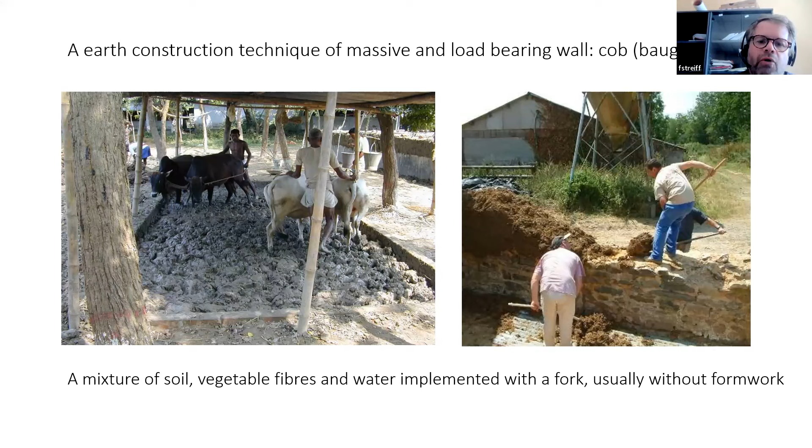So usually we work with a fork, and most of the time without any formwork, as you can see on this picture. So the mix most of the time is produced by animals or humans, and then implemented on the wall directly with a fork. We just build a first layer of this mix of cob, a layer that is around 50 to, let's say, 1 meter high when the soil is very good for that. But most of the time it's a height around 50, 60 centimeters,

that we will let dry very little, so 1 to 2 days, before we cut the face of the wall with a specific tool we call the paroir in French, which is something used to pare or to cut or to face the wall. So it's a kind of spade, as you can see on the left of the picture, that allows us to cut at the final size and shape the wall.

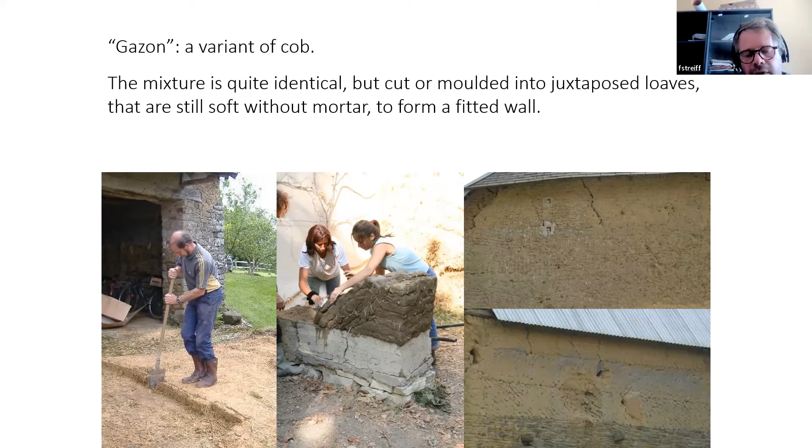with each other, and as they are not dry, they stick together, and that allows us to produce that kind of wall that you can see here with that implementing process, like fish. I don't have the word in English, sorry, but you can see the shape changing from one layer to the other. So that's another way to build, a sort of variant of cob.

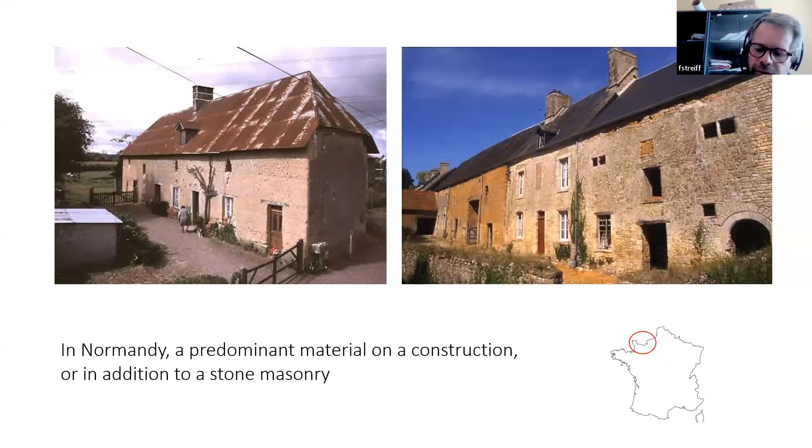In Normandy, cob can be used as a predominant material in construction, as you can see on the left pictures, or it can be used as an additional material on stone masonry for barns, or just to elevate the stone walls a bit more. But especially in the marshes of Cotentin and Bessin, so in the middle west part of Normandy, we've got huge buildings, and old buildings. Most of the ones you can see here are from the 16th, 17th century and still existing, made with cob.

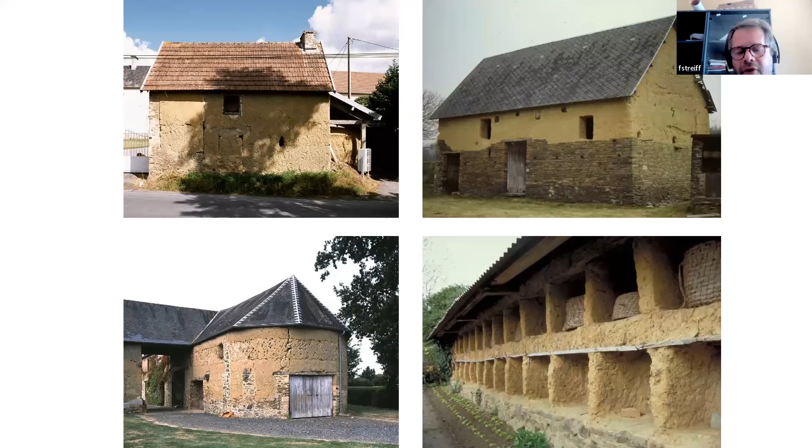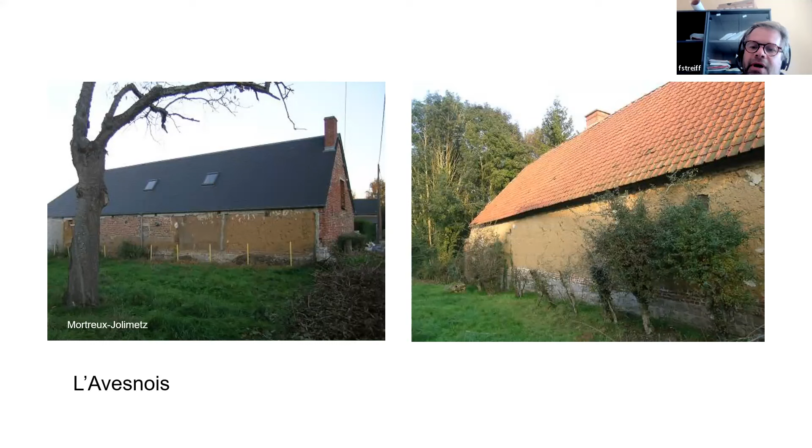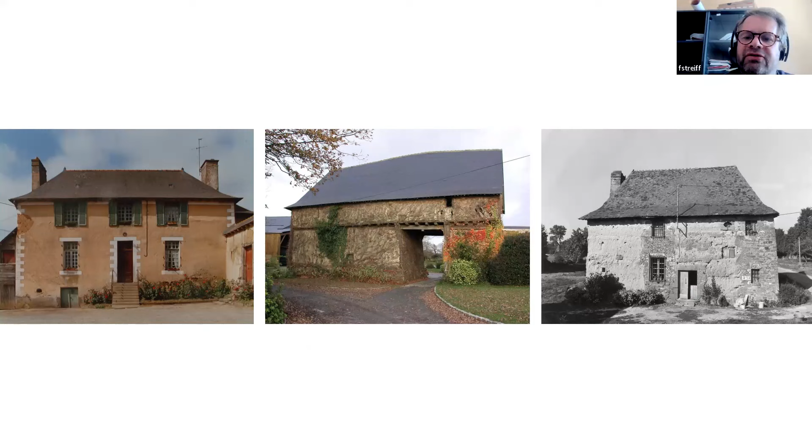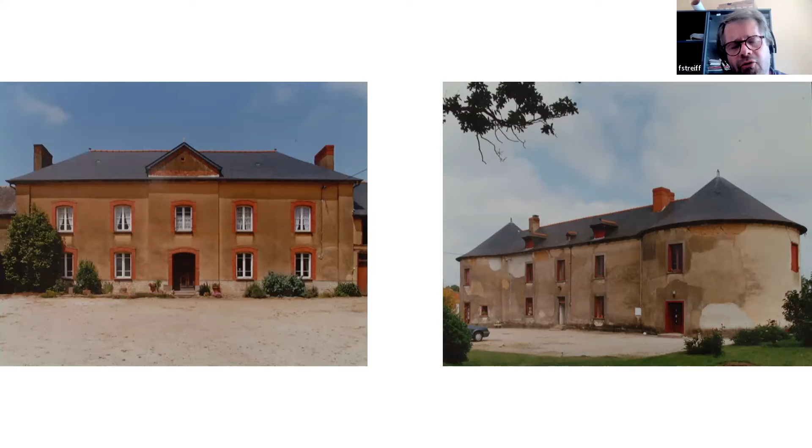Like this one, lots of farms as well from 17th to 19th century. Mostly those buildings were built between the 18th and 19th century. Lots of farms as well, so huge buildings, 2-story, sometimes 3-story. In Brittany, this building, for example, on the left is a 3-story building, but well, cob is really used. We've got the same amount of buildings in Brittany, around 20,000 of those buildings still existing today. So it'd be like in Normandy here.

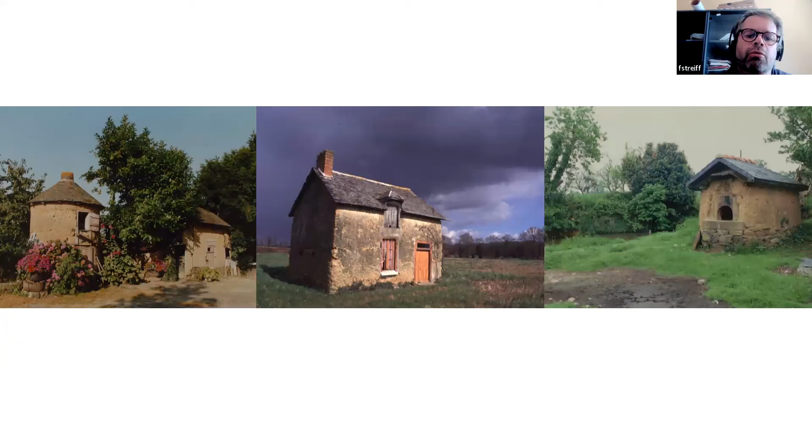So other samples here to show you that it's really a very important technique used in west of France, and as well for very small buildings. We've got some very small other area in France where we can find that sort of buildings here in Vendée, so center-west of France, close to the sea. So small, very small buildings here, built with a very sandy soil with a bit of clay. And these ones are very poor compared to the ones you can find in Brittany or in Normandy. They are very, very small buildings, small farms.

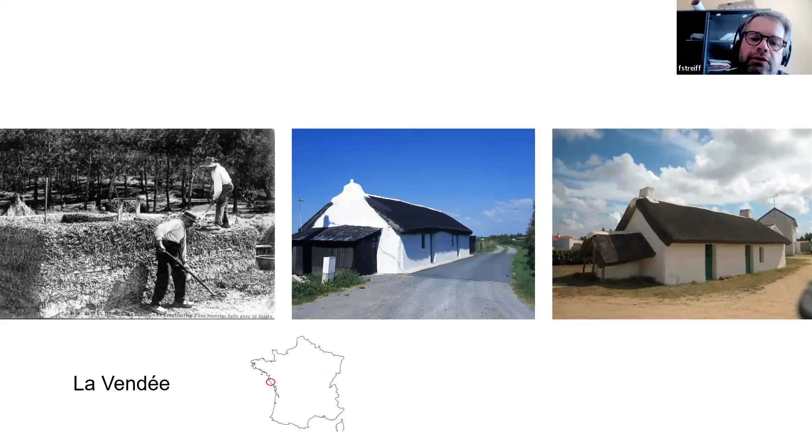And same thing for the Pays de la Loire. So around the Loire River, we've got plenty of those cob buildings, mostly for farms, not for a living place for people. So a heritage that is really in danger because there's no use today. So lots of those buildings are in a very, very bad state, as you can see here.

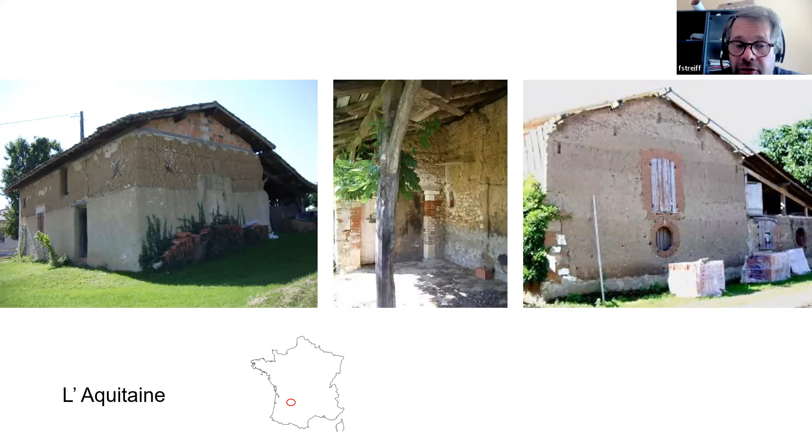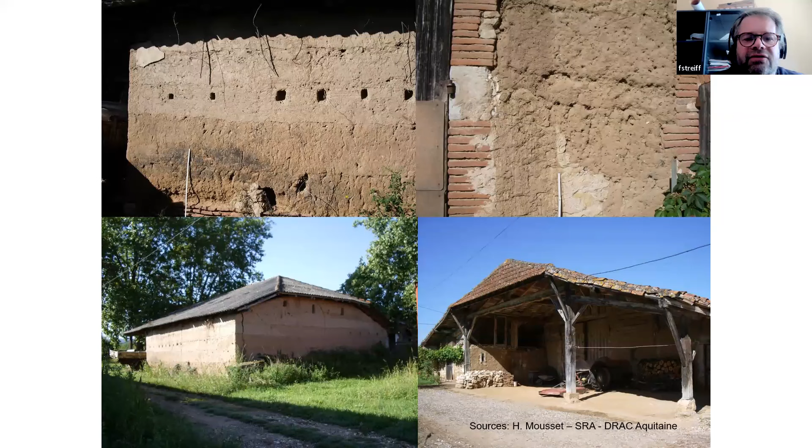And south of France, we have also huge heritage, a small area, so less buildings compared to Brittany and Normandy, but very nice ones, and as well some farms, so some places where people are living, so quite well maintained. People try to renovate the house properly. So a heritage that is still in a good state mostly.

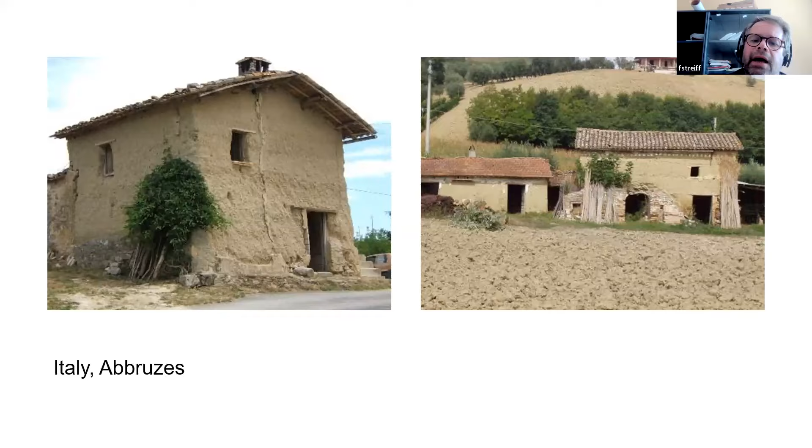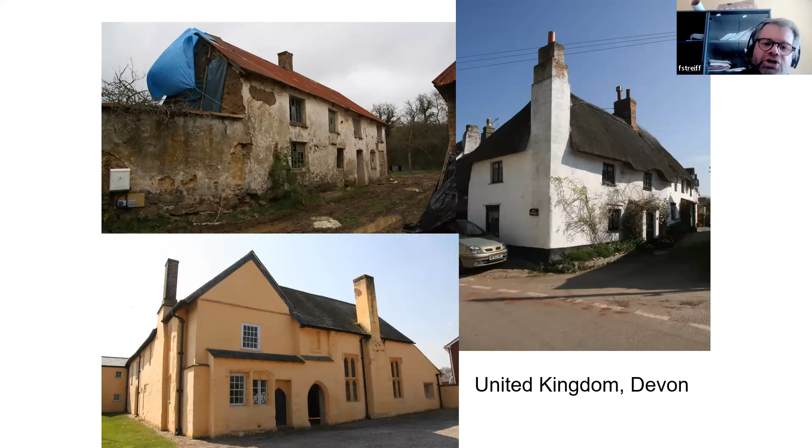Another part of Europe where you can find a lot of cob buildings is the United Kingdom, and especially in the south of UK, in Devon, where you have a very nice and a very important heritage. Even if you can't really see it. I've shown you some pictures in Normandy and Brittany where you can really see cob, because cob is not covered with a lime plaster. But in UK, most of the cob heritage is covered by a plaster, so you can't really distinguish cob and stone masonry. But a huge heritage with lots of curvy walls, sort of hobbit houses that are really appreciated by English people.

In the center of Europe, here in Moldova, you can find in this area sort of cob mixed with a timber frame. It's not really wattle and daub because there's not really a wattle or weaving structure on which the mix of earth and fiber is fixed. It's really a massive wall, so it's really cob, but mixed with a timber frame.

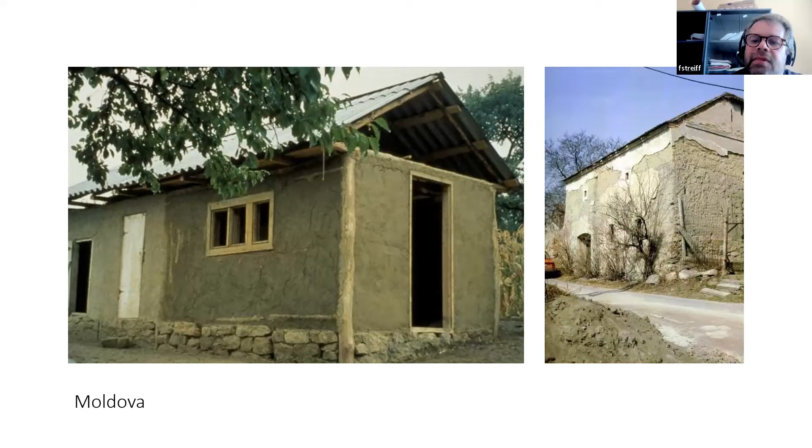You can find some samples as well in the north of Europe, in Poland or in Estonia, with a technique which sometimes can be confused with rammed earth, because they have the small layer of fiber implemented in between a layer of earth, so it looks like rammed earth, but it's not really rammed earth because it's a wet mix which has been implemented.

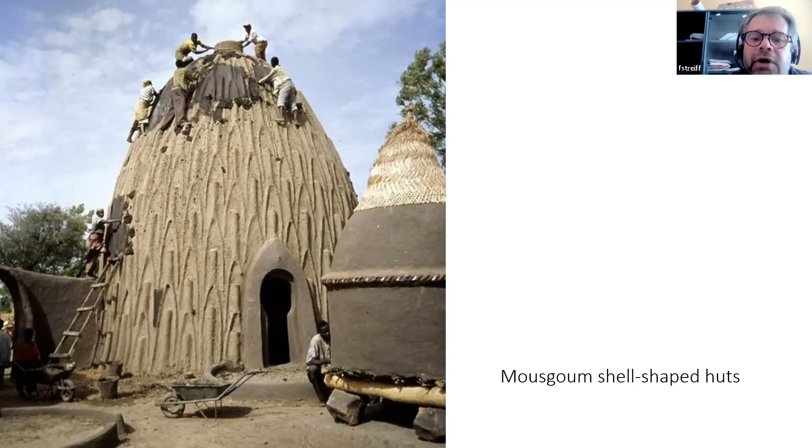Just to show you the other samples of cob that are used in other places in the world. Here in Cameroon, with those shell-shaped huts, really built by hand, and with the same mix finally, with less fiber than the European cob, but it's finally a wet and plastic mix, which is implemented without any formwork, just shaped with the hands.

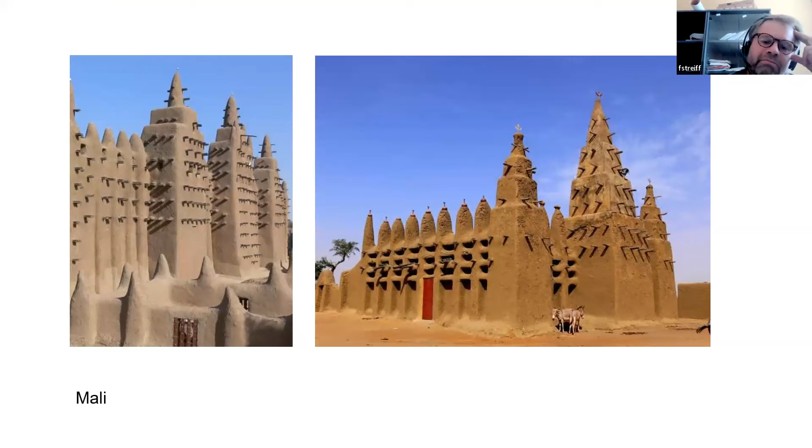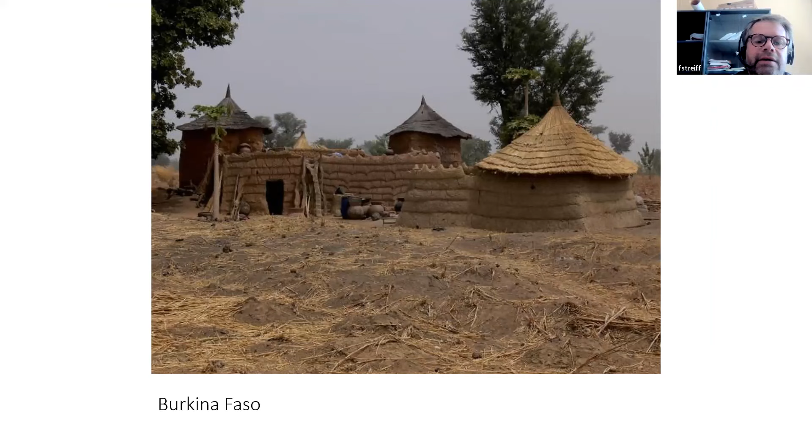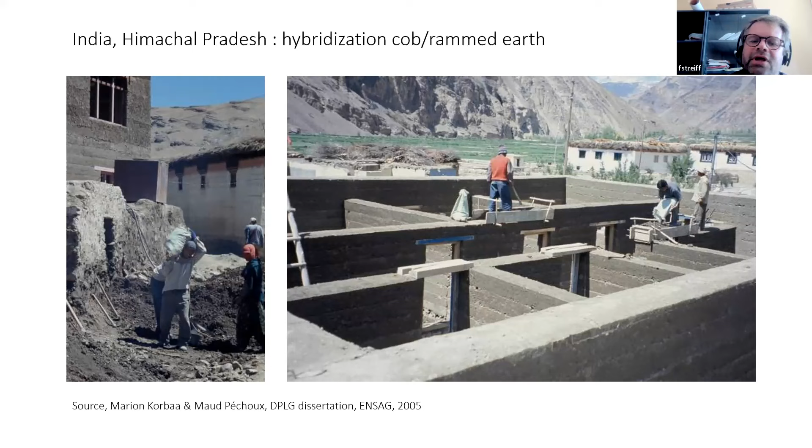I just show you this picture here, which is not really cob, not really rammed earth. It's in between. It's a sort of hybrid technique, because it's a very wet rammed earth and a very dry cob, and it's something we tried to use in some modern experimentation about cob here in Normandy, and I will show you some pictures. We'll probably make the link with these samples here.

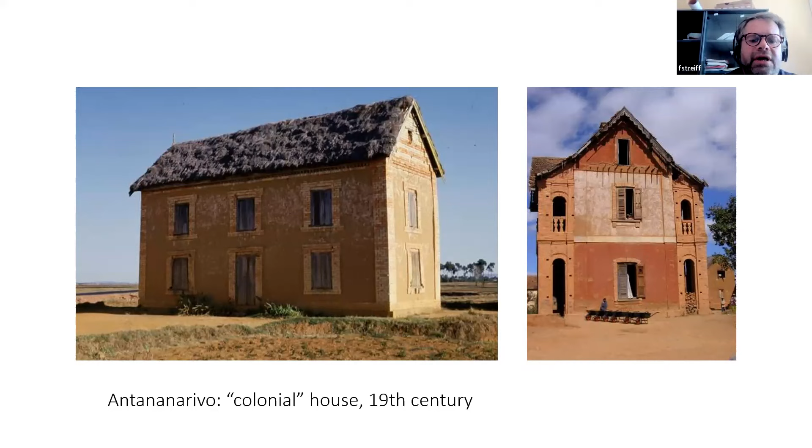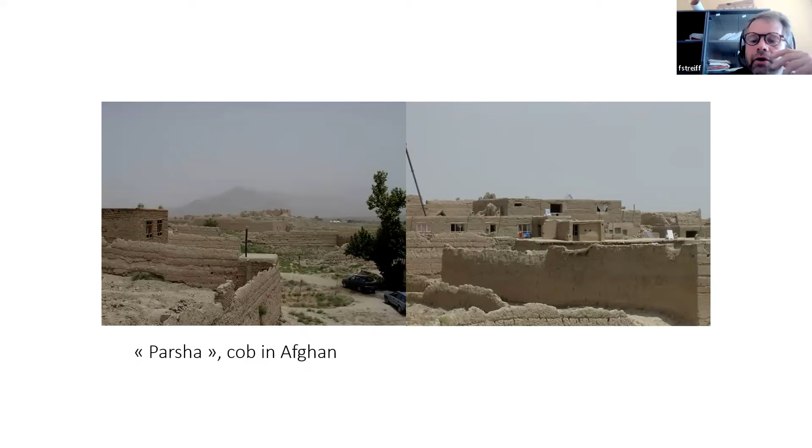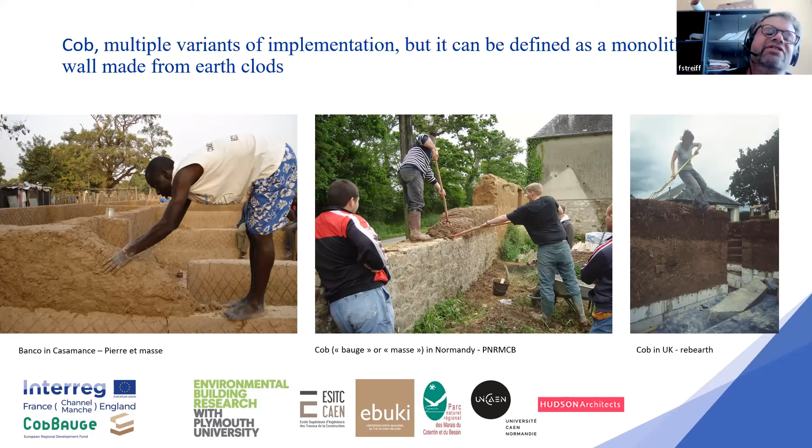So if I'm coming back now to the CobBauge project, a research project on modernization of cob building, we made this first statement that cob was implemented in different ways, but most of the time with techniques that require lots of human power, a very heavy technique to build very big walls with a big thickness. So a huge amount of material to implement, which makes the technique not easy to use in a modern way.

We also agreed with the fact that all those techniques were very well represented in Normandy and the south of the UK, where the partners of the project were living and working. So this CobBauge project is a project of 6 partners, and the 3 historical ones were the University of Plymouth, the School of Engineering from Caen, ESITC, and the Regional Park.

And we designed this project, the 3 of us, and then we added some other partners. So the English association EBUKI, Earth Building UK and Ireland, the University of Caen, and a private company, Hudson Architects, which joined the group, and the 6 partners agreed to work on this project because of this common cob heritage in Normandy and the south of the UK.

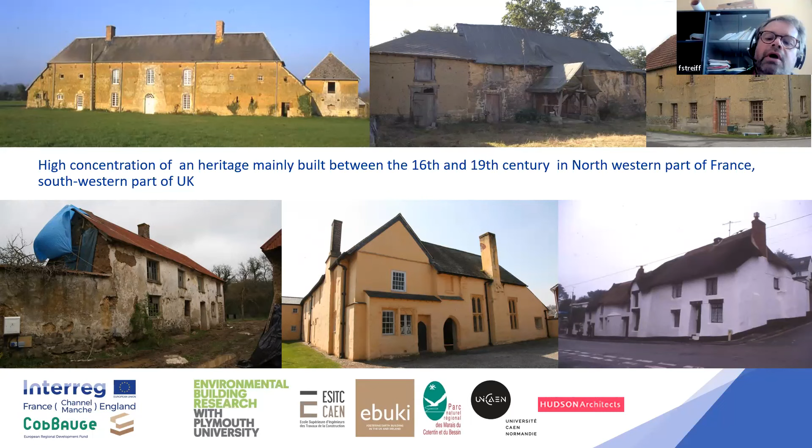In France, we had a different experience, not really coming from this counterculture movement, but coming mainly from heritage.

A few samples, like this one from a builder in Brittany, where he tried to reproduce or modernize the technique that I've shown you, called gazon. So using lots of volunteers on his site, he used this technique, cutting some small bricks and implementing them in the formwork to be sure that the wall would be built in a straight way and in a safe way for the volunteers. So he adapted these techniques, trying to build some new buildings.

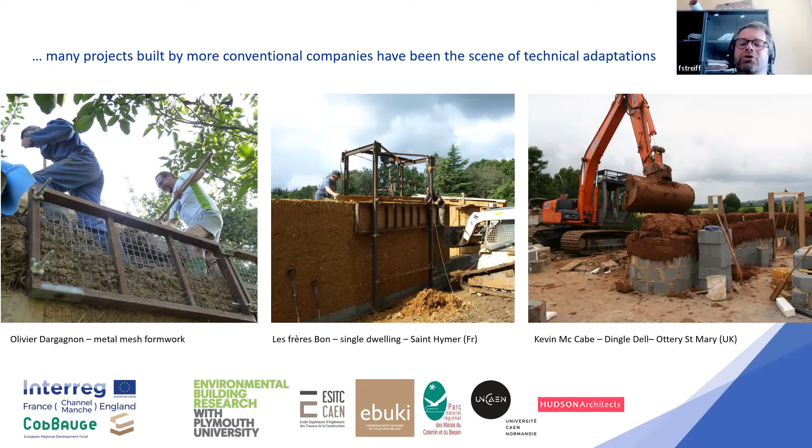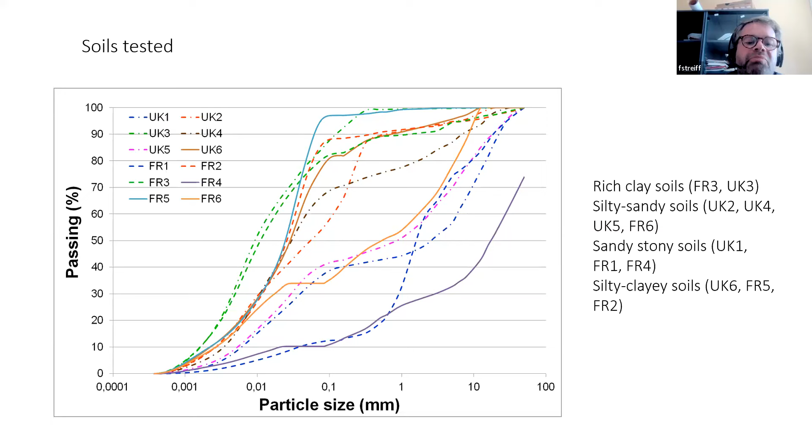So to start this work, we tried to find and test different materials, different fibers and soils to produce the mix. So here, just to show you the variety of the soils we have studied: some very rich clay soil, some sandy soil, some stony soils, and clay silty soils, to have a very good overview of what could be done and achieved with that kind of material.

We first started to make a series of tests to understand the relation between fibers, water and the soil. So a first series to understand the performance and the method of making the samples, and for that we asked builders to show us the right viscosity or plasticity of the mix, to be sure that the scientists in the labs would reproduce something which really meets what the builders are using on the building site, and which allows them to always reproduce the same materials in the labs.

Those first samples, we tested them, even if it was not really well done from a scientific point of view, because we just produced one sample for one mix. We should have produced three samples to have something really relevant from a scientific point of view, but this was just to have a first approach, a first overview of this relation between the amount of fiber, the amount of water, and the amount of soil.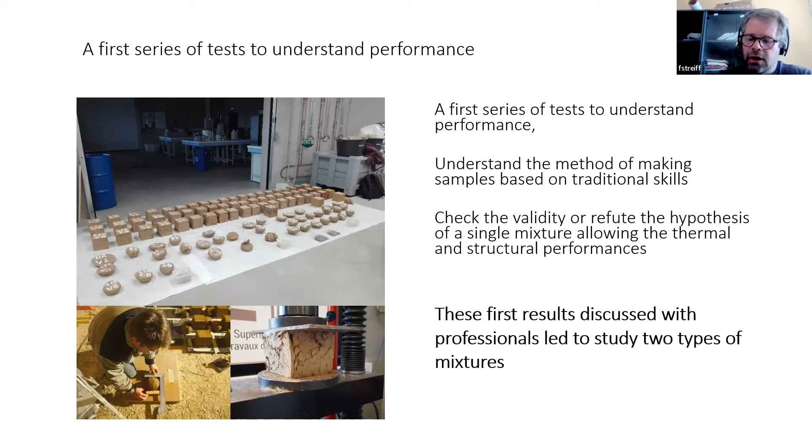To have a first overview, we tested those small samples, which allowed us to see that it was really utopic to have just one mix, good for insulation and good for load bearing, to support all the load of the building. So we continued in this approach of two different mixes, and together with the builders and the scientists, we defined the good mix and produced some tests which will allow the scientists to reproduce those materials in the labs for the studies.

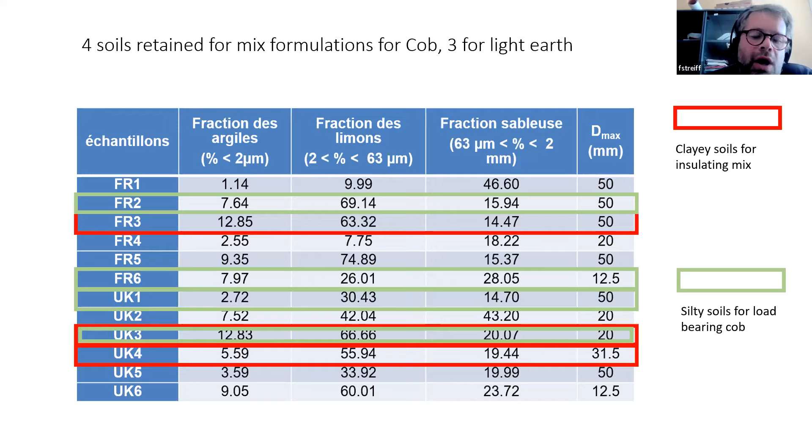So after we had made this first study on the soil, we chose to keep just three different soils from the UK and different soils from France. Three of those soils to produce the insulating mix, the light earth, you can find here in red, and we chose four of the soils to test the mix for cob, for the load bearing part of the wall. So you've got an overview here of those soils. They're very clay soils for the insulation, and well-graded soils for the cob.

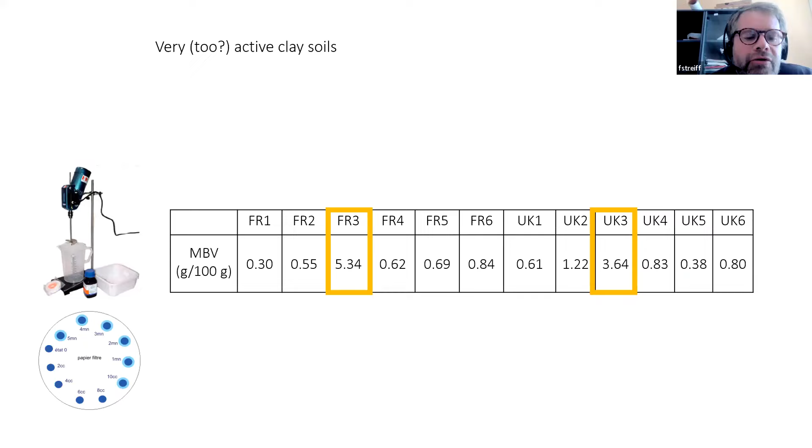We've tested as well the activity of the soil, and some of those soils we used for the light earth were very active clay, as you can see here, which gave us some issues on our first prototype we built after this first part of the study.

Regarding the fibers, we tested four plants which represent six fibers. First, wheat straw, as the fiber which is used traditionally in cob buildings, so it was our reference to compare the other fibers. We tried to use reed, which was used in Devon and in Normandy, in the thatch roofs and so on. So we had these plants in several areas in the country.

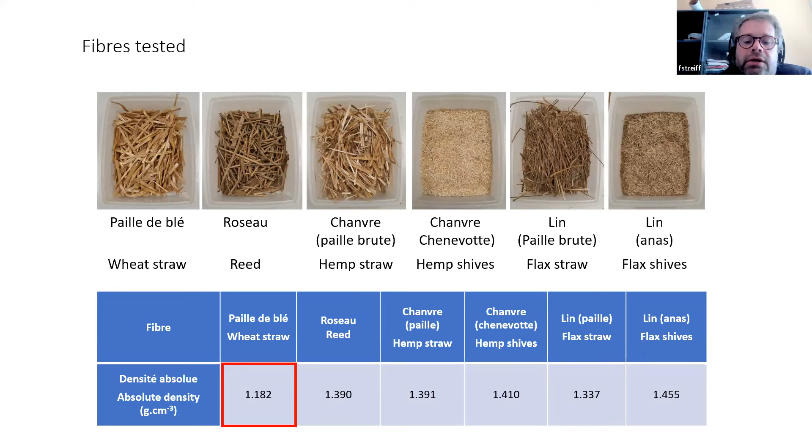We studied hemp in two states, the raw hemp straw and hemp shives, just after removing the fibers from the plants, and the same thing for the flax. We used flax straw, the raw flax straw, and the flax shives. And you can see here that just regarding the absolute density, the wheat straw is the poorest material we studied. That means the others could have better properties from a load-bearing point of view.

And we tested them regarding two other questions. The water absorption: we studied that because if you've got a plant which absorbs a lot of water, it means that you need to add more water to still have something very plastic. So the less it absorbs water, the less water you will have in your mix, and probably the shorter drying period you will have at the end. That was the idea behind that study.

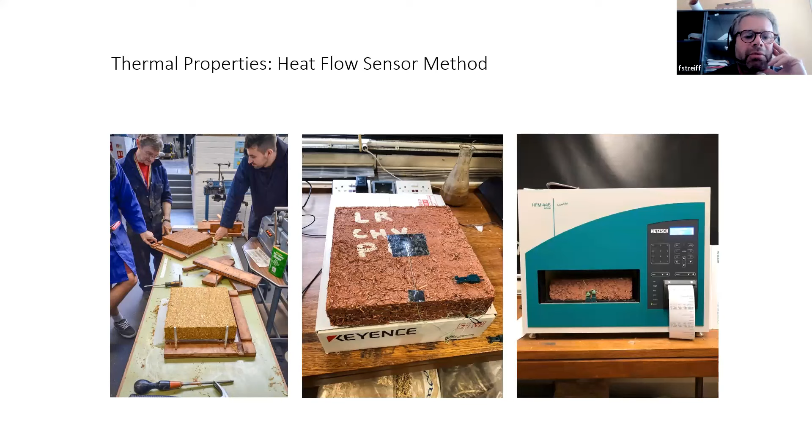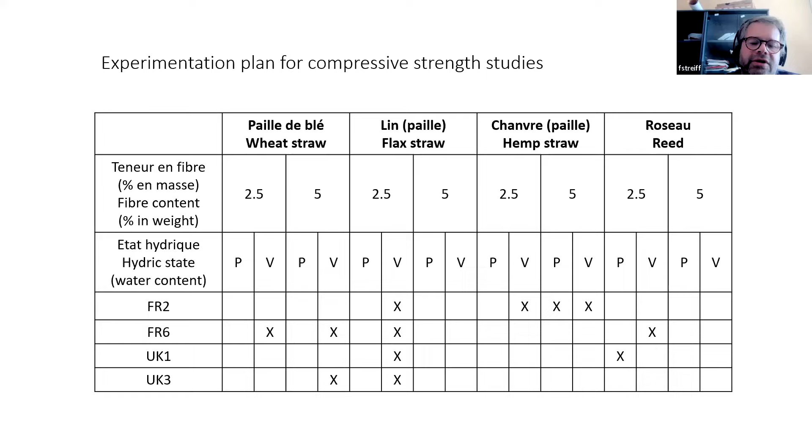Regarding thermal properties, we used the heat flow sensor method to test our samples. And here is the experimentation plan we produced, because we didn't have time to test all the samples. So the scientists produced this plan to just test a few possibilities, and the results of those studies can anticipate the behavior of the other mixes.

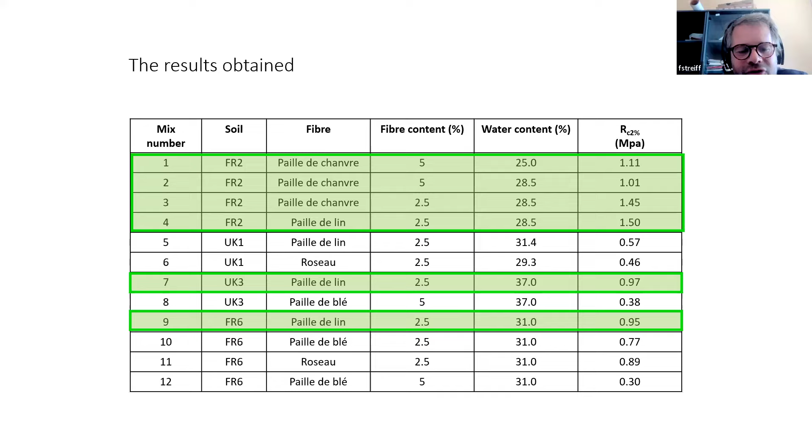And here are some of the results regarding the compressive strength, where we managed to have some good resistance with the use of flax and hemp straw, around or more than 1 megapascal, so something really interesting. And once again, if you're looking in the spreadsheet, in the place of wheat straw, we had very, very bad results. Just here to show you that it really fits with the previous results.

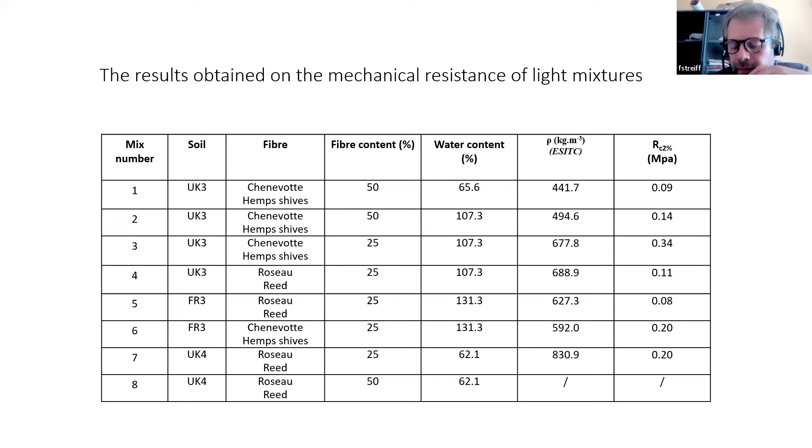Regarding the mechanical resistance, the compressive strength of the light mixture, of course, we've got some very poor results, but it's not the load-bearing part of the wall, so not really important here. So the results we obtained with this first study prove that flax and hemp allow us to gain from a mechanical point of view, mechanical resistance, compressive strength, compared to the straw traditionally used.

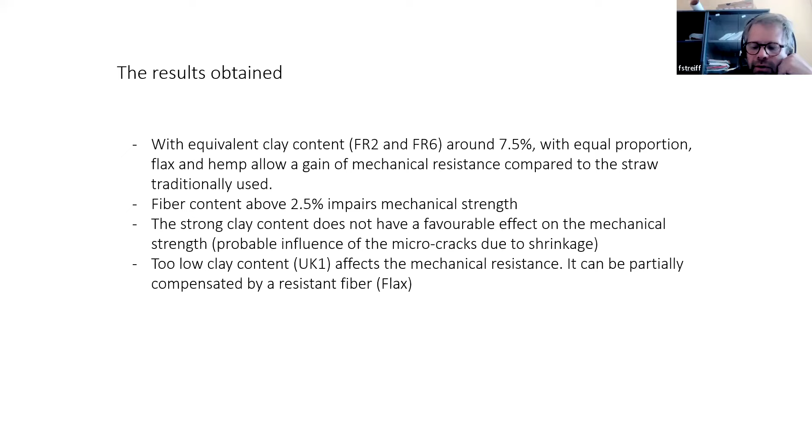The fiber content above 2.5% impairs mechanical strength. The strong clay has not really a huge impact on the compressive strength, and if we have finally a very low clay content soil, this experiment shows that just using a different fiber could allow us to improve a bit the compressive strength of this poor material.

Regarding the thermal resistance as well, the scientists produced a plan for experimentation here with just a few samples with 25% and 50% in weight of fibers in the mix, and we had some really interesting results. Here you can see that even if the soil was exactly the same, even if the clay content was exactly the same, the water content was exactly the same, we managed to produce samples with very various density.

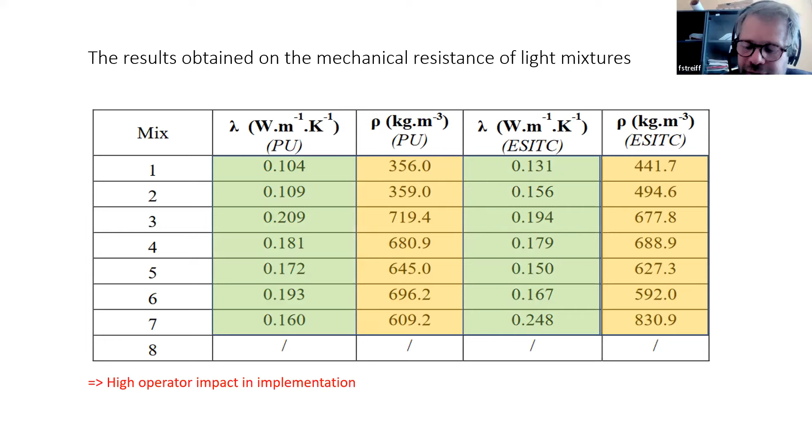Meaning that for light earth, the implementation process has a very huge impact on the density and, of course, on the lambda value results. So it means that for the light earth, more than the proportion of the materials, it's really the way that builders will implement the material which will produce the good properties of the wall, the good thermal properties of the wall.

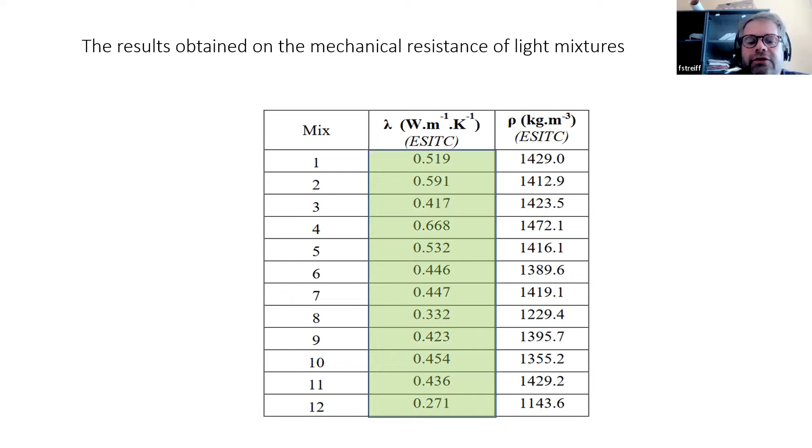With the load-bearing mix, we also tested them from a thermal point of view, but as you can see here, very little impact, and even if the proportions were the same, the density was very close. It's really on the light earth that we have a big issue with the implementation process.

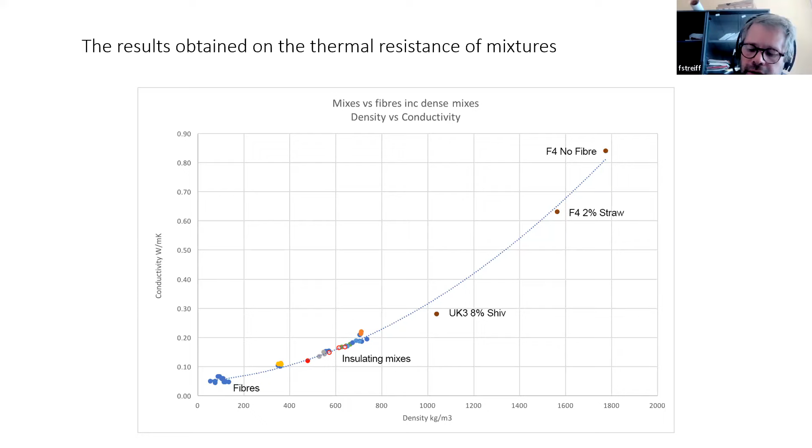So here, just a graph to show you where we had our results regarding the light earth and the load-bearing cob. That allows us to make some simulations to see if that kind of material, so a very dense material for the cob and the load-bearing wall and a light earth, could help us to meet the regulation.

So within that sort of theoretical calculation, we managed to see that with a wall 60 centimeters thick, 30 centimeters of cob, 30 centimeters of light earth, we managed to have a thermal resistance of 3.8, so a U value of 0.26, which allows us to meet the English thermal regulation and helps us in the French regulation to meet the performance that is required. So something really, really encouraging, which pushed us to go deeper in the building process.

So for that, as you've seen in the first study, we knew that just one mix was not the solution, but two mixes, one load-bearing, one insulating mix, were necessary. So we tried to experiment with builders. Here with Becky Little, a builder from Scotland, during a training course near Lyon, we tried to produce a sample of wall, a scale one wall, implementing those two mixes to see how it would react.

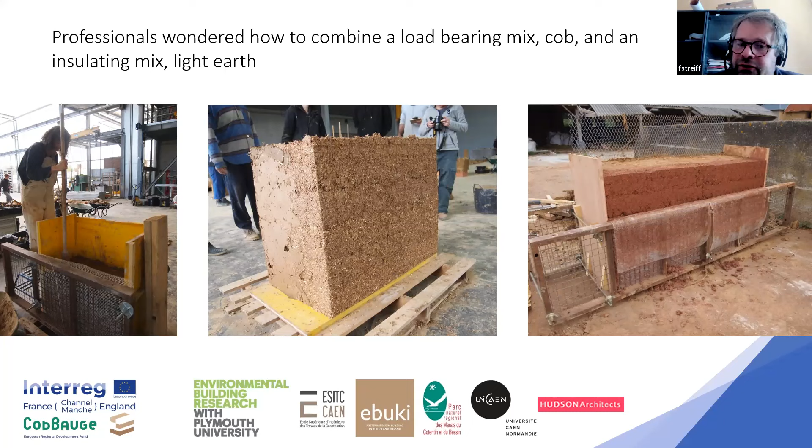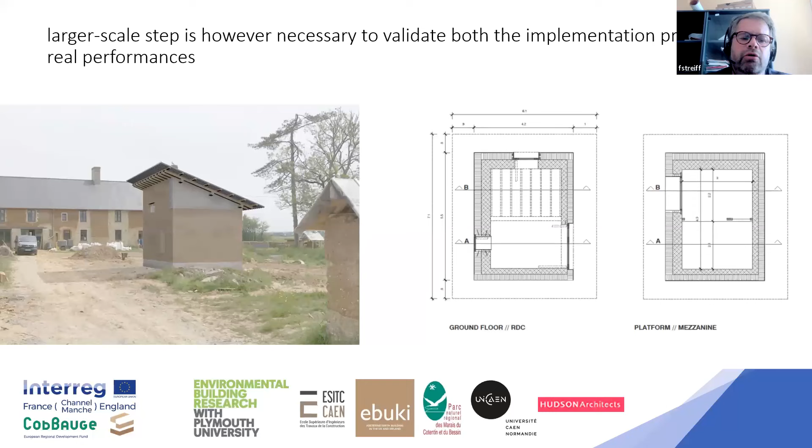So it was a first step, just trying the building process, but it doesn't really give us information about the real performance of the material of the building, and didn't give us information about all the building process with that new way of building with cob. So we decided to try a larger scale building, which was a very small one, just 13 square meters. We decided to build here in the marshes of Cotentin a small building, but with a lot of difficulties to test different building details.

So for that, we tried to improve the formwork. So if you remember those first pictures, a very artisanal... sorry, I don't find the word in English. Handmade. Yes, thank you, Matthieu. Handmade formwork made with metallic mesh and a metallic frame.

We tried to use aluminium formwork used for concrete, and with the company, the producer of those formworks, we tried to modify them to include a metallic skin instead of the plywood.

Those formworks were lighter than the first one, and were interesting as well because most of the modern or huge building companies using concrete were familiar with that kind of formwork and were able to use them very easily.

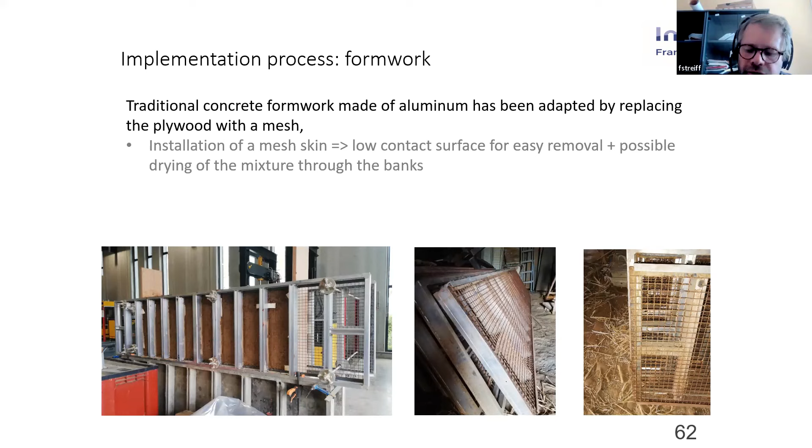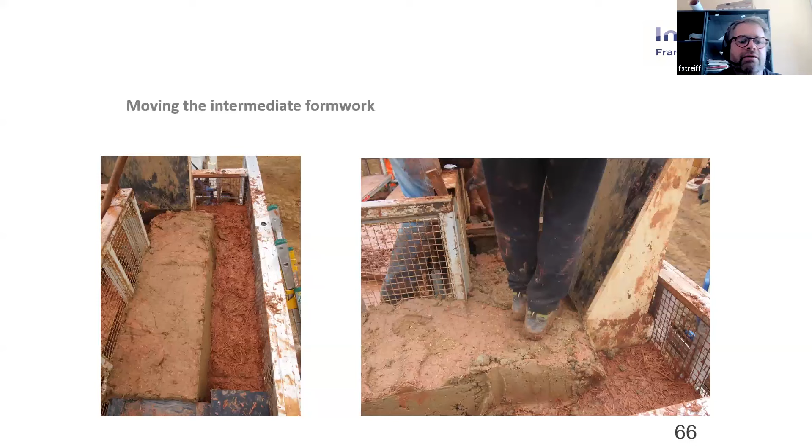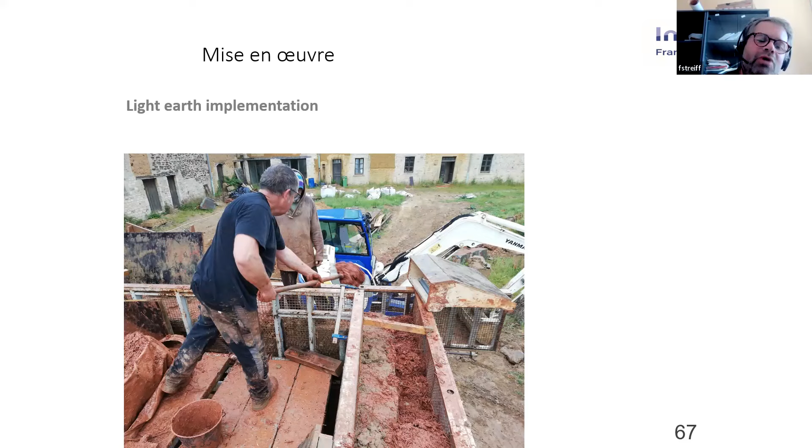And just moving this intermediate formwork, we had a gap here that we could fill with light earth. So we proceed a bit like rammed earth, finally, with small layers. For rammed earth, a layer is about 8 centimeters high. Here we could build 20 centimeters high, but we use that small layer process. The light earth, same thing.

Sorry, a bit too noisy.

So the same process. We just have to gently ram the light earth to densify it and to make it stick with the cob. So it allows us to have that kind of wall here, with a section you can see on the right. It allows us to have a good harping, I don't know if it's a proper word in English, but you see the layers can really connect together. And we obtain as well a regular layer to ensure both the load-bearing and the insulating capacities of the wall.

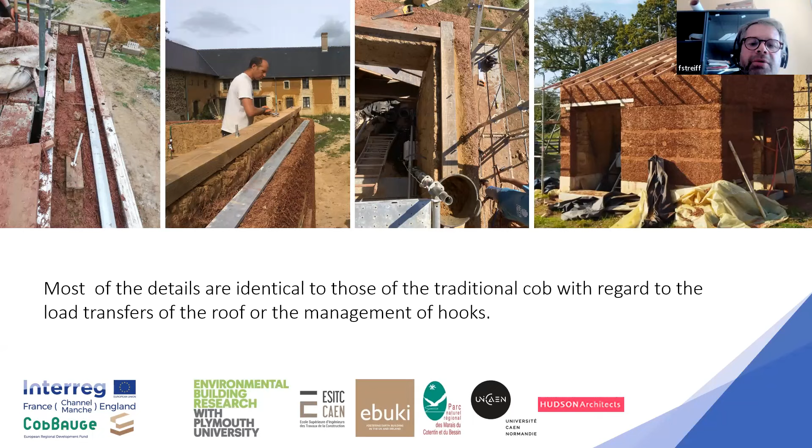For the rest of the details, most of them are really identical to the ones we use for traditional cob. We just had to adapt those details a bit, but it's the same thing. Some stuff to hook, to anchor the wall, to connect the roof structure on the wall. So quite the same thing, just some different things regarding the floor, because of course without any formwork you can put all the beams as you're going up on the top of the wall.

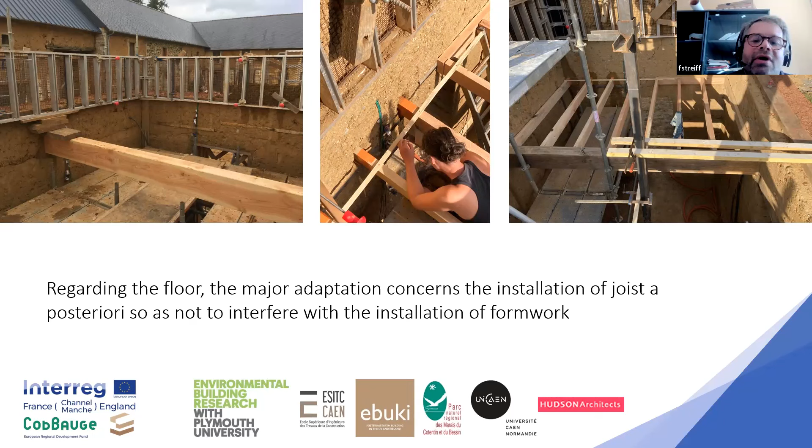So you implement your floor at the same time you build the cob walls, but with the formwork it's not the same process. So we had to adapt the system, and we tried several details to find the best one, or the quickest or easiest one. We also had to study some way to fix all the window openings on the wall. So we tried several places to fix the openings.

We tried to fix them on the light earth. We tried to fix them at the junction between the light earth and the cob, and we tried to fix them inside on the cob directly, and tried to see as well how we could achieve good airtightness properties on the walls to have a very good global insulation or thermal performance on the wall.

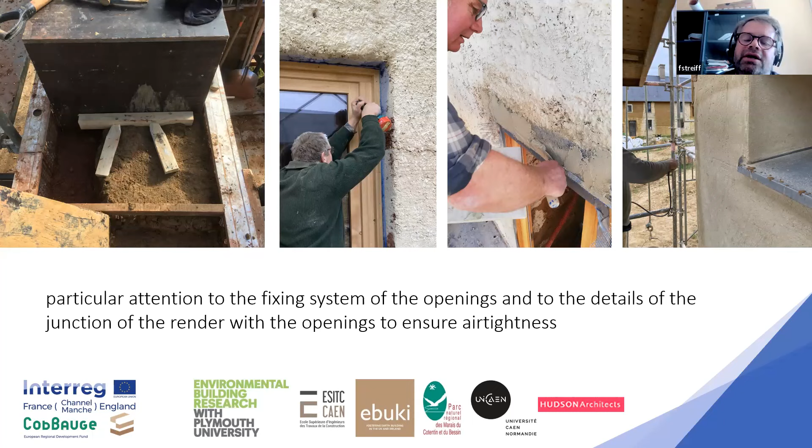So that kind of plastic mesh implemented in the internal or external lime or earth plaster works pretty well. And we made some tests, some blower door tests, to see if we managed to achieve the rule regarding that in the thermal regulation, and just plastering the wall, just filling the small cracks or small gaps in the cob wall, we managed to pass the regulation quite easily.

We measured a lot of things during the building process. We tried to measure the organization of the building process, of the construction. So here are samples of the time of implementation that we measured, showing that for the first layer we spent 2 hours per square meter, and then for the fourth lift, just using the digger, we managed to reduce this time of implementation by 2.

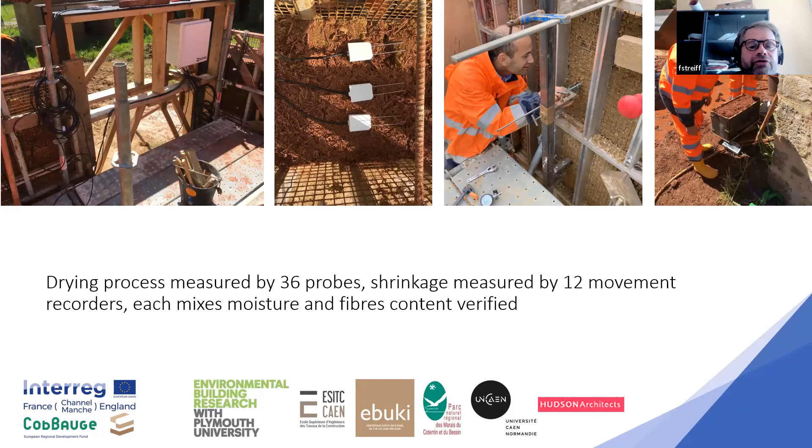And then we've seen that building a 2-story building meant that we had to use different engines on the building site, and it took us a little bit more time, 8 hours per square meter. We have measured the drying process. So the School of Engineers put lots of probes in the walls to have a good survey of the drying process.

And we had a few issues with the formwork, but mostly because of the light earth and the clay content of the light earth. We had some small issues, some cracks in the wall, and a deformation or movement in the wall, mainly due to the clay activity of the soil we used for the light earth.

But what is interesting here is the fact that when we tried to find a solution against this problem, we used some geogrid. You can see here on the right pictures. And these geogrids work pretty well in the corner, in reinforcement in the corner. And finally, it's something interesting regarding earthquake resistance.

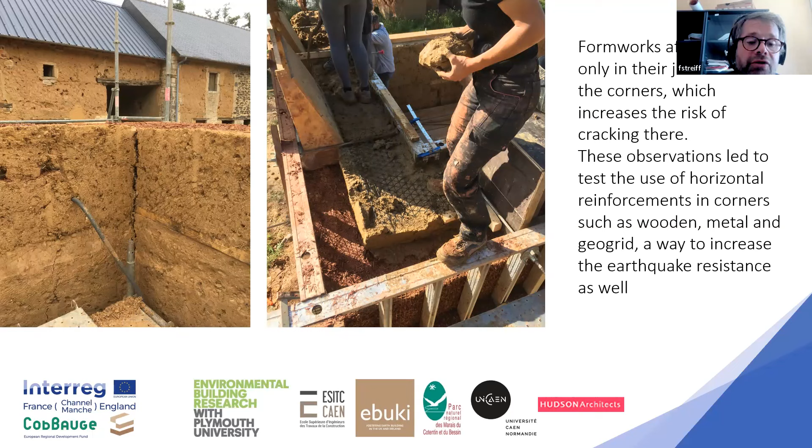We've seen after that this kind of geogrid was often used in rammed earth to reinforce rammed earth structures regarding earthquake resistance, and finally it's close as well to some US regulation on cob buildings regarding earthquakes. So finally, these techniques I show you here can be useful if you want to try this technique in Turkey.

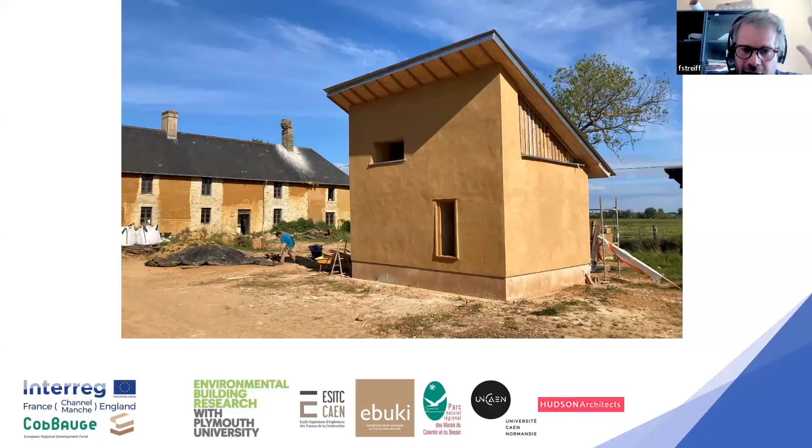So this is the prototype finished here. It's still in place after one year, so it seems to work. Cross the fingers. But after this first experiment, we decided to build other buildings, of course, trying to see if we could manage to solve some of the problems we observed in this first prototype.

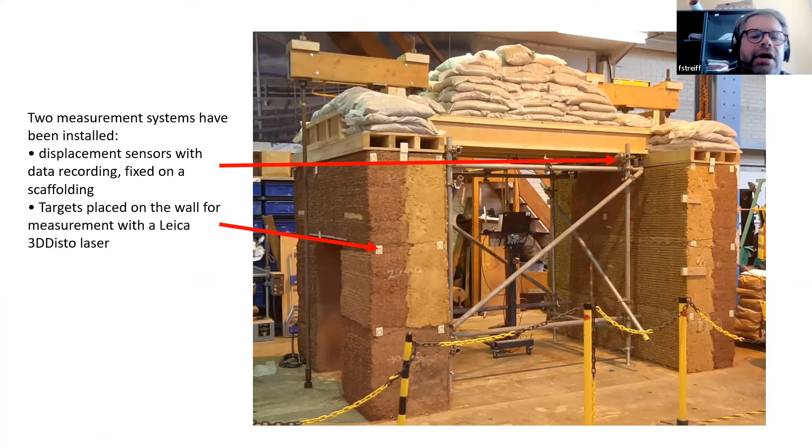So here in Plymouth, they decided to build some test walls in the lab to measure the movement after loading the wall. As you can see here, they put lots of sandbags on top of those walls, and they also produced a huge pressure with metallic stuff on top of the wall, just to see if they could achieve the resistance of a two-story wall with all the load that the wall would have to support.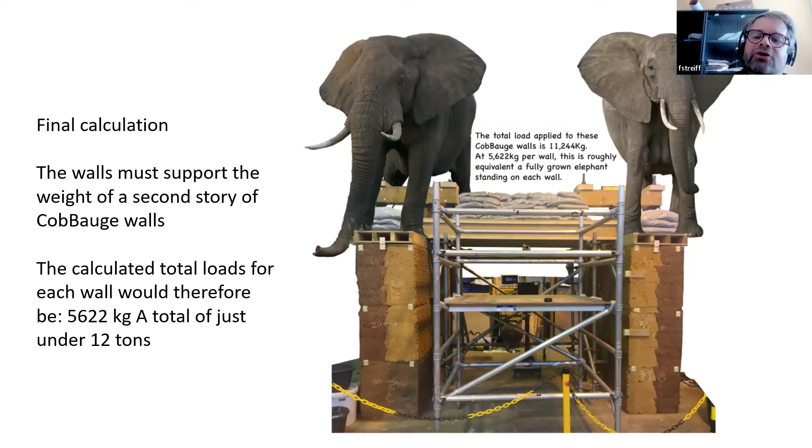And they produced these funny pictures here, but without any cracks and without collapse of the wall, they managed to put the equivalent of an African elephant on top of each of those walls. So it seems to work pretty well. They should have tried to break those walls, to go further in the load bearing of those walls, but I haven't got the result actually.

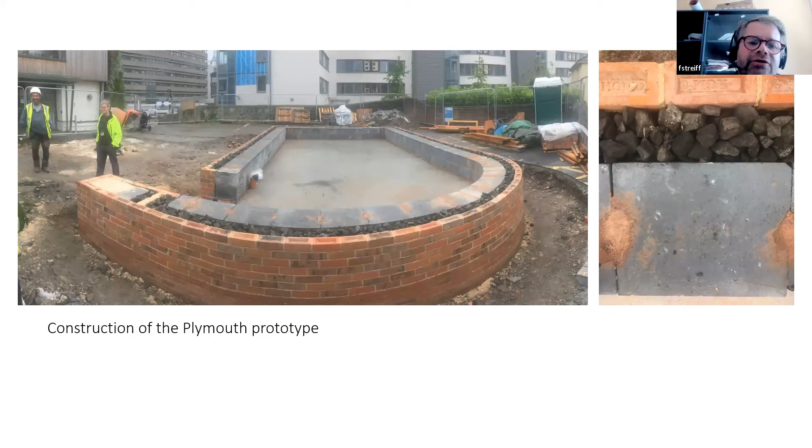That helped them to be more confident, and the University of Plymouth decided to build a classroom on the campus. So they built their own prototype, bigger than ours. They tried different sorts of formwork, just a wood frame here with metallic mesh, and tried to use some curved formwork to produce some curved cob walls, because as I've told you, English people like the curvy cob wall, and they're really attached to that sort of shape. So they decided to try that, and they built in quite the same way.

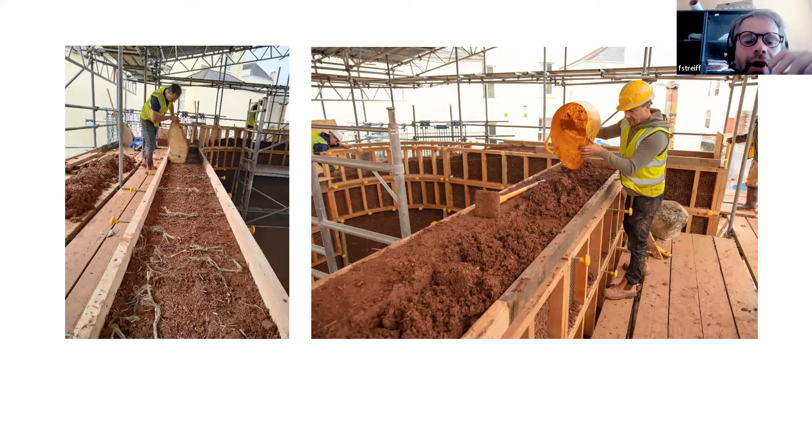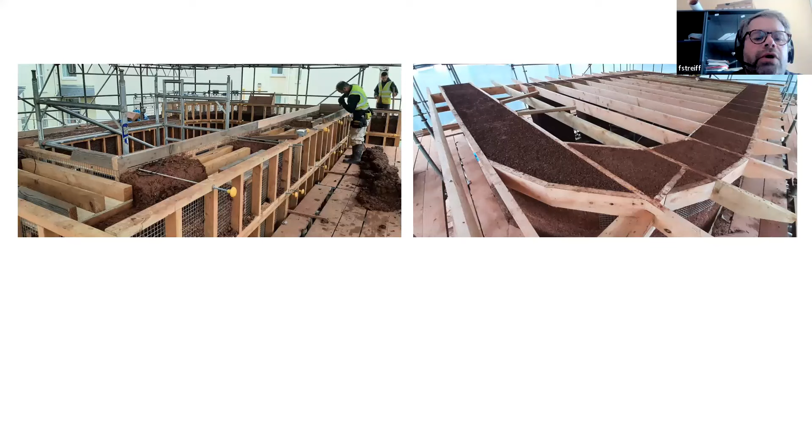Just using less machinery on their building site, lots of manpower because of the location of the building, which didn't really allow them to circulate around the building with a digger. So most of this building was implemented by hand. So here the building is finished.

And they implemented some measurement as well. So lots of sensors in the walls to measure the drying process, but also the heat transfer in the wall. And they decided as well to measure the shrinkage of the building with a laser disto, and they've seen that there was no deformation of their wall.

We used a very rich clay soil and reed shiv for the light earth in Normandy. Here in the UK, they decided to use hemp shiv. They had a very rich and active clay soil as well, but just the fact that they used hemp shiv instead of reed shiv, they managed to avoid the deformation of the wall. So the issue we had in Normandy in the first prototype was mainly due to this bad mix using reed shiv and clay soil; just using less compressive fibers like hemp allowed them to avoid this issue.

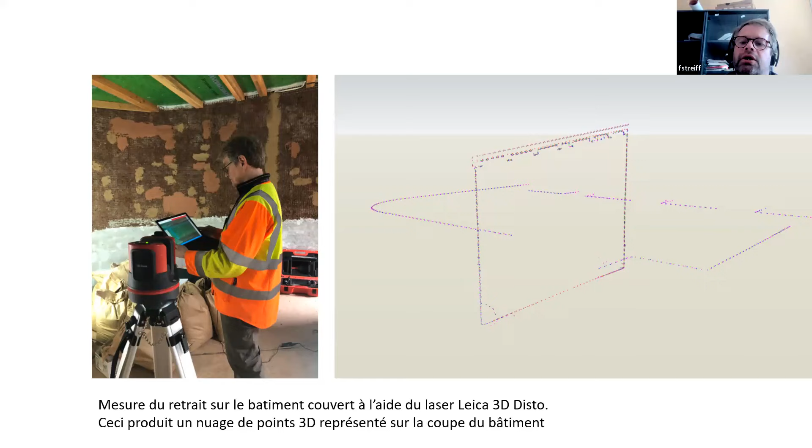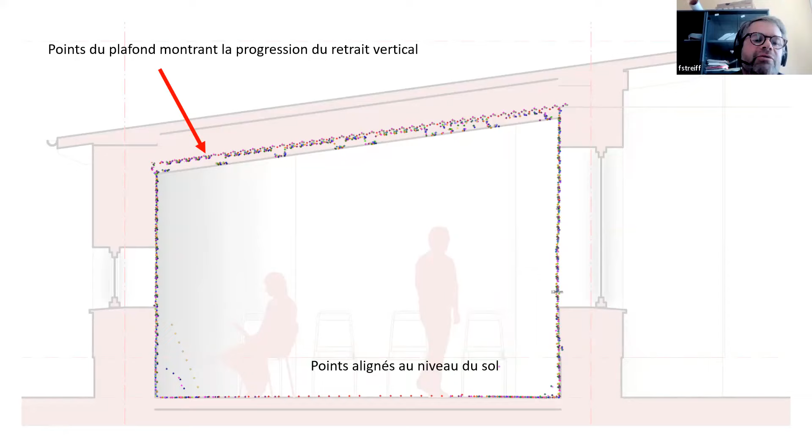But we still have a huge shrinkage. Sorry, I forgot to translate this slide. But you can see the point showing the roof going down during the drying process. No deformation, but a very huge shrinkage. So something to have in mind when we build, especially regarding the windows.

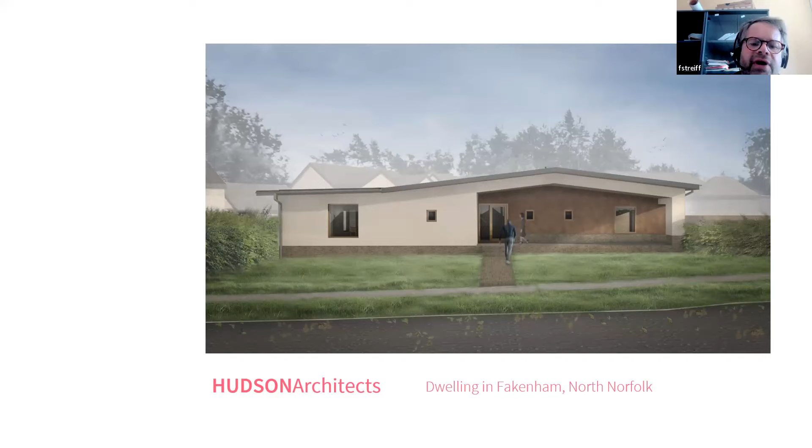So here the building is finished and used for six months now. They're using this classroom. And finally, another project designed by Hudson, one of the partners, close to Norwich in the east of England, where they managed to find a client to build a dwelling here in Fakenham. So the drawings here, it's a house of around 80 square meters, built with this technique. So some details of the plinth here.

An overview of the building site, and they decided to use a very different formwork. So building a formwork inside directly at the right level and shape, and just moving the external formwork as they were building higher on the wall.

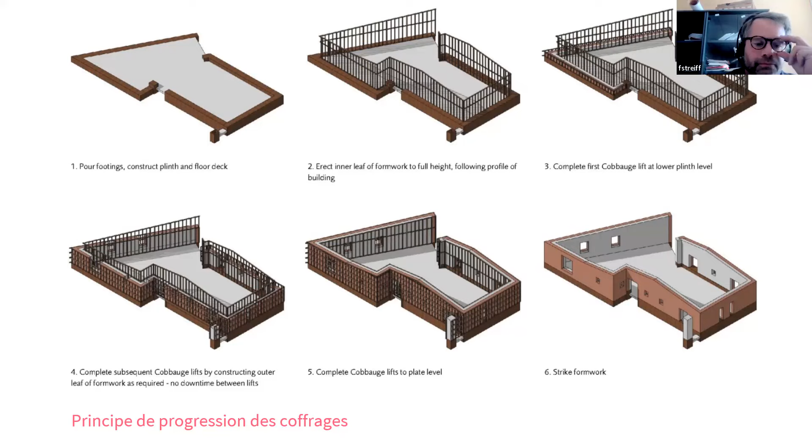So here's some view of the building site and the process. They built in the same way as Plymouth. They didn't really take care about the organization of the building sites. They could have used a digger if they had put the scaffolding inside the building and not outside. So they lose some time, they lose some energy, human energy, by this mistake.

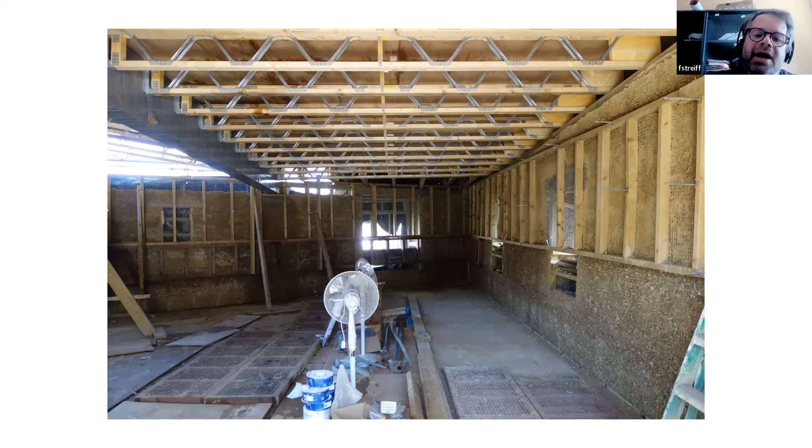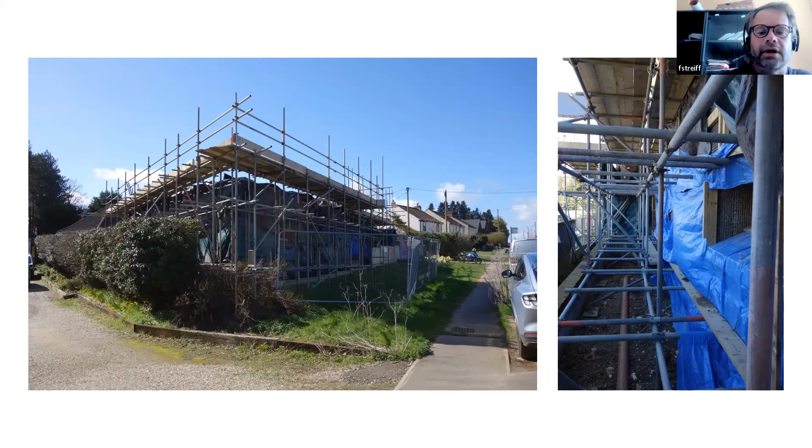But finally they managed to build all the wall, and that's the state where they were at the end of March this year, or end of November, to be more honest. So they had to stop the building process during the winter, and now the cob walls are finished and are drying, and they hope to be able to make the internal plaster inside by September. No. Just some pictures taken in March, end of March.

So regarding this cob project, you can find lots of studies, guides, details, training videos on the website of the project. You can download them for free without any problem.

And just to finish and make a link with one of the questions for you in Turkey after this earthquake, I've tried to find a few references of studies regarding earth and earthquake and cob and earthquake. So I managed to find a few things really interesting, and I will send to Matthieu the PDF of this presentation, so you will be able to have access to those links and those studies.

But what I've found, even if I'm not really a specialist of earthquake resistance, just having a very quick look at the conclusion of those studies, most of them are pointing that cob is quite good regarding earthquake resistance, mainly due to the amount of fibers in the mix. Compared to rammed earth, for example, it has an impact reducing a bit the compressive strength of the material, but the fact that we have lots of fibers in the mix finally increases the properties of the material regarding elasticity.

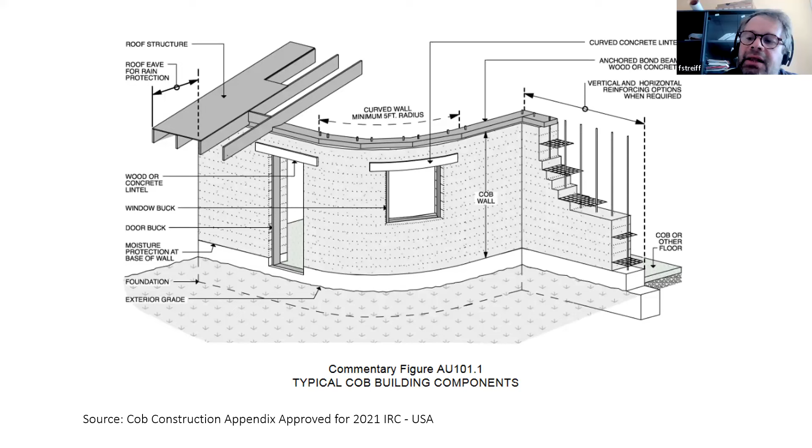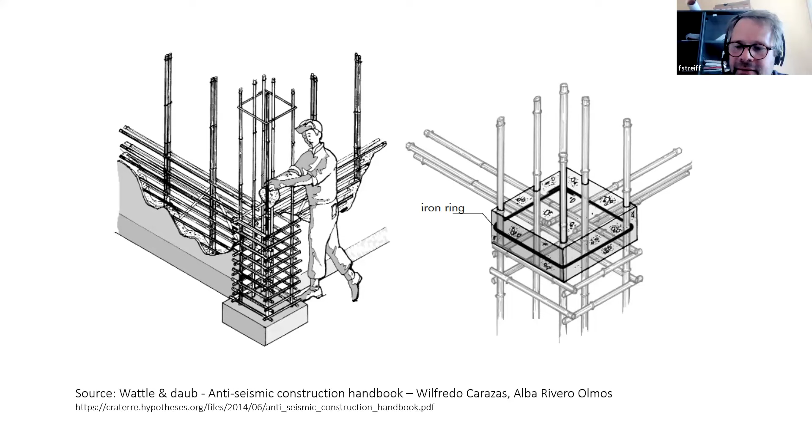They call it wattle and daub, but we could probably easily build the same thing with cob, with walls 40 or 50 centimeters thick without any problem. So just using that kind of bamboo reinforcement implemented in the cob, we could probably achieve a very strong wall. And I think, yes, it was my last slide.